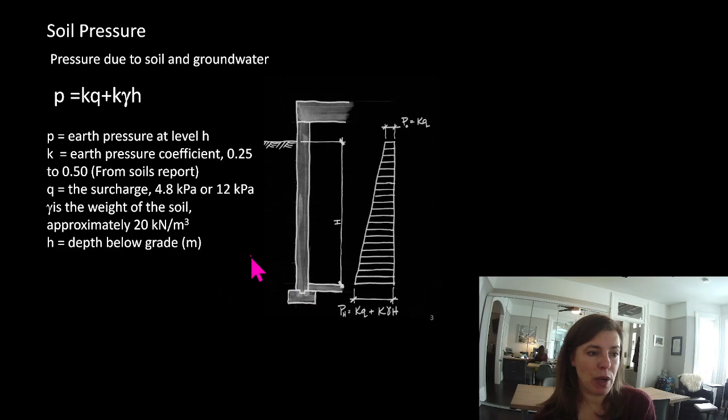Now, this wall here has a floor that stops it from tipping over. If this wasn't here, it would be a retaining wall, and we'd need something very large here to stop this from tipping over. All right, let's do a quick example.

I'm just going to check that my son shut the door. He did not. Okay, so sorry about that. If the door's open, if the door's shut, it at least gives them the tiniest desire to rush in here. They see it open and they come running in.

So the building previously discussed, I'm assuming the building that we talked about last week, has a 2-story deep basement, each one being 4 meters deep. The laneway adjacent to the building could be used for fire truck access. The geotechnical report states that the weight of the soil is 19 kilonewtons per meter cubed.

So that means every meter by meter by meter cube of soil weighs 19 kilonewtons. So a stack of soil a meter tall by a meter wide by a meter long is going to weigh the equivalent of about 19 Arnolds. And our K, or earth pressure coefficient, is 0.3. So these two things were given to us from the geotechnical report.

What is the soil pressure in kPa at the top and the base of the foundation wall? So let's do this example here.

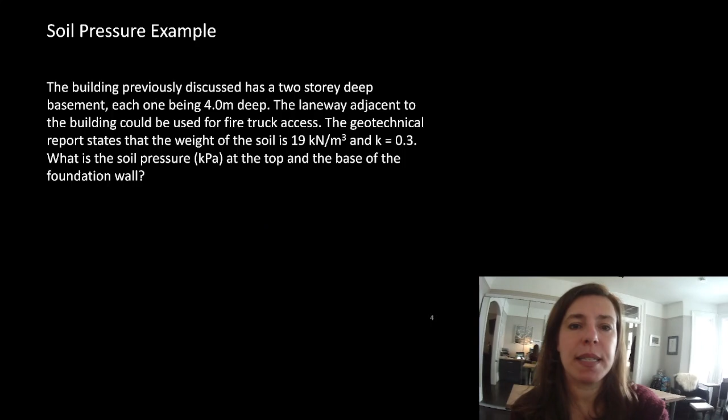Okay. I apologize, my kids are very, very loud today. Okay.

All right, so I always find that if it's something that doesn't have a picture, to draw a picture. I find drawing pictures very helpful. And like I said, over the next few weeks, we're going to spend a lot of time actually drawing pictures.

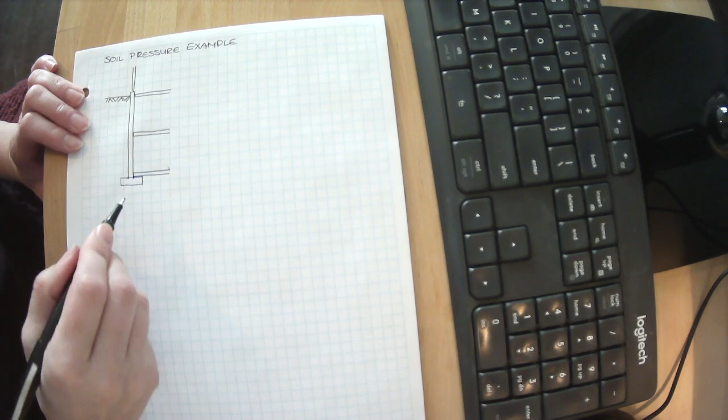So this is our soil pressure example. Here's our building. There was some building up above here, and we know there is the ground floor here, and then 4 meters down there was another floor, and 4 meters down is our basement. So let's draw something to represent our floors here. Here's our basement. We've got some sort of footing here. And here is our foundation wall. And here is soil, and there's some building up here. All down here is soil, and this is soil. They have told us that this could be used for fire trucks.

Do you like my fire truck? Yeah. This is why I'm an engineer and not an architect.

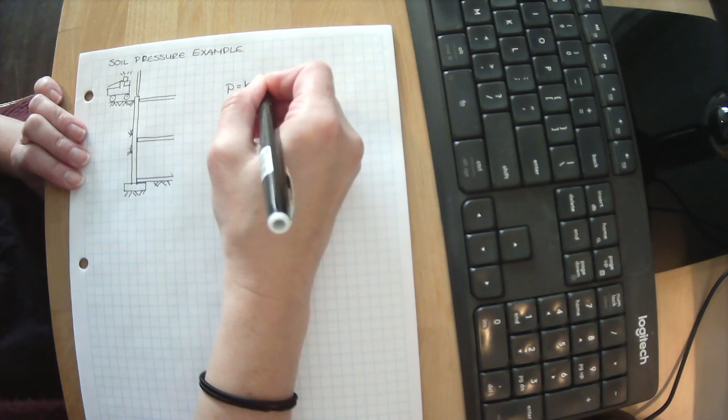Okay, so we know that the equation for earth pressure is P equals KQ plus K gamma H. K, the geotechnical report gave us as 0.3. Gamma, the geotechnical report gave us as 19 kilonewtons per meter cubed.

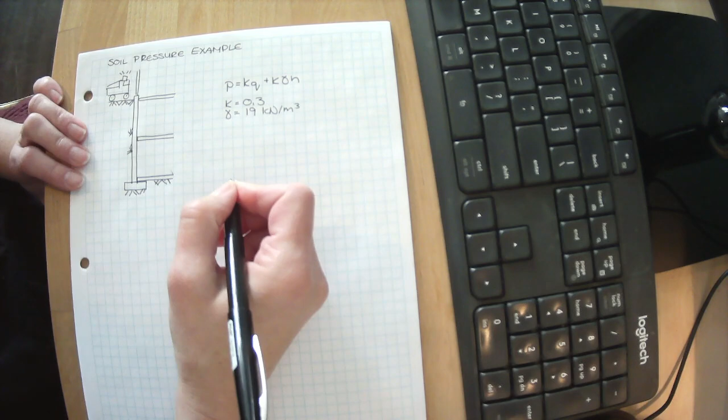Q is the surcharge. Well, if it can have fire trucks out here, fire trucks we know have a live load of 12 kPa. All right, so we could have up to 12 kPa of live load out here. So we need to design this to resist the surcharge of 12 kPa out here. And then that gives us our K, our Q, our K, our gamma.

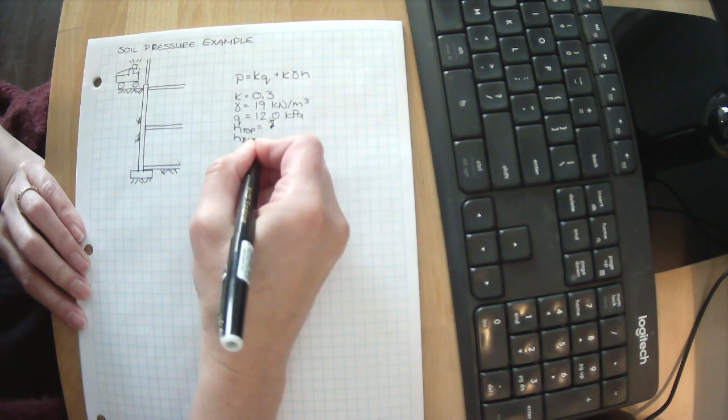We have two different H's. We had H at the top, which is 0 meters, because we're right here, and H at the bottom. They told us that each story was 4 meters.

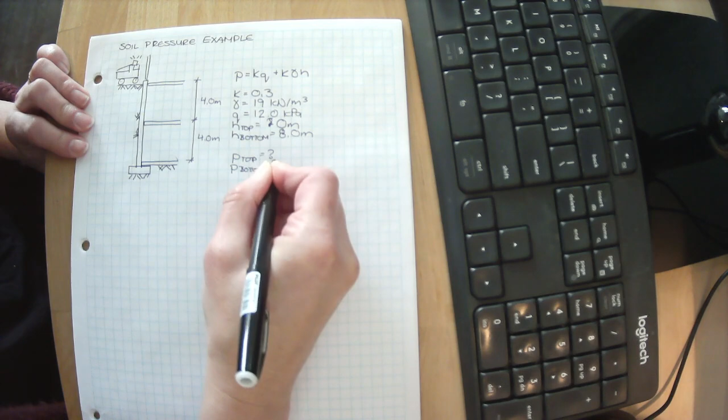And what we're looking for is the pressure at the top and the pressure at the bottom. I'm not very focused for some reason.

All right, so P at the top: our K regardless is 0.3. Our Q regardless is 12. Our K is 0.3, our gamma is 19, and H at the top is 0. So the pressure at the top is 0.3 times 12 plus 0.3 times 19 times 0. And we have 3.6 kPa. So the pressure pushing in right here at the top is about 3.6 kPa.

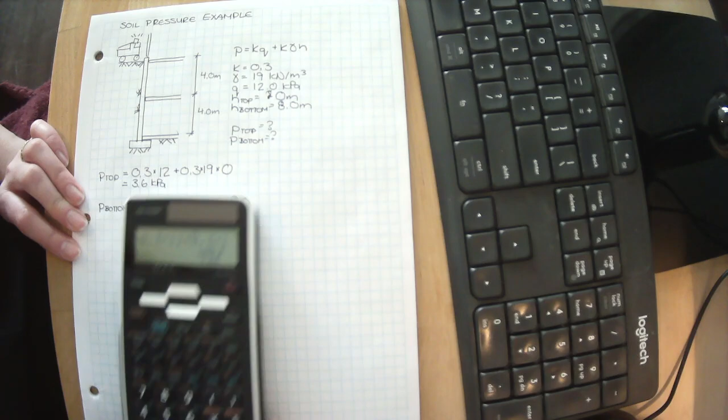Let's look at the P at the bottom. All right, we still have 0.3 times 12 plus 0.3 times 19, times this time we're all the way down here at the bottom, or 8 meters. So we have 0.3 times 12 plus 0.3 times 19 times 8 equals 49.2 kPa.

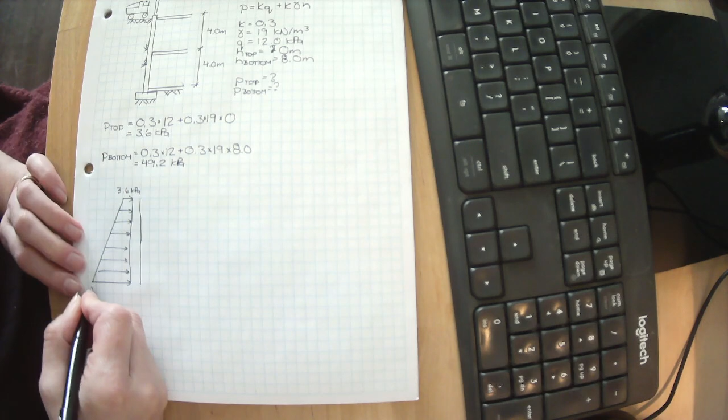So what we're saying is we have this wall that is 8 meters tall, and right here we have pressure pushing in. Up here it's 3.6 kPa, and down here it's 49.2 kPa. If this is my wall, what's stopping it from sliding this way? Well, we know right here we had the basement, right here there's some second floor or second basement, and right here we have the ground floor. So this pressure is trying to push in, and the wall is going to bend between these spots and bend between these spots. And that's all the question has really asked us, is what are these values here?

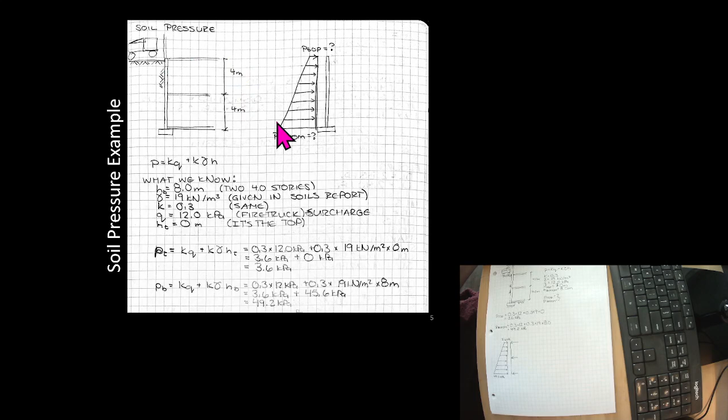So here it is worked out for you as well in the slideshow. Feel free to take a look at this on your own time scale if you want. Oh, my fire truck was equally bad in that version of drawing it. Okay, and here it is worked out, typed out, just so you can see it nicely if you find you have a hard time with my handwriting.

Okay, let's come back up to me.

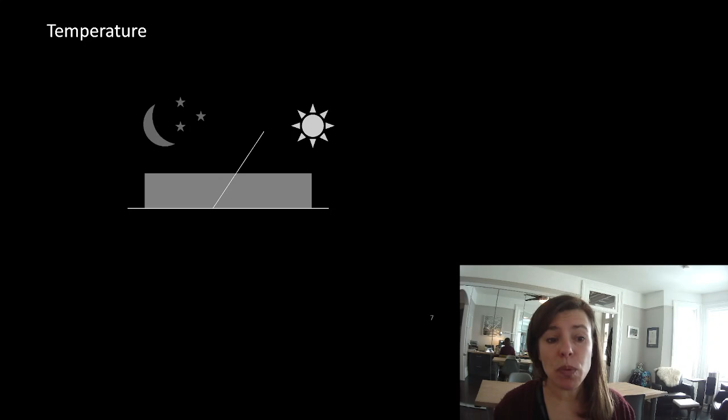All right, so what are some other load types? Now these ones are less common and ones that we don't tend to worry about as often in design. That doesn't mean they don't exist. They can be very important in design.

So one of the big ones is temperature. Steel expands when it's hot and contracts when it's cold. Most of the time, or for the life cycle of most buildings, our steel is inside an envelope, so its temperature variation is maybe 16 degrees to 30 degrees. Most places have air control systems of some sort, so the steel in the building would be kept in a relatively narrow margin of temperature.

It often has a big impact on, I'm drawing a blank on the word, where you don't have an air system inside your building, like an open building, an uninsulated building, or during the construction process. Projects I've had to worry about it on have been community centers where there were arenas and swimming pools in the same building, because it can have a big impact. Or buildings where you have gyms that can turn into an arena.

Now, most arenas, the slab for ice is really, really good. I remember playing hockey in the Ricoh Coliseum and at the new version of the Maple Leaf Gardens. And the lights are so hot on the ice that you can actually feel it when you're skating under the lights. You'd have to really plan your gear when you were playing on those ice surfaces. But then I also remember playing at York University in their rink, and it being so cold that your feet would freeze. So different rinks can have different kind of air makeups depending on how they're being used.

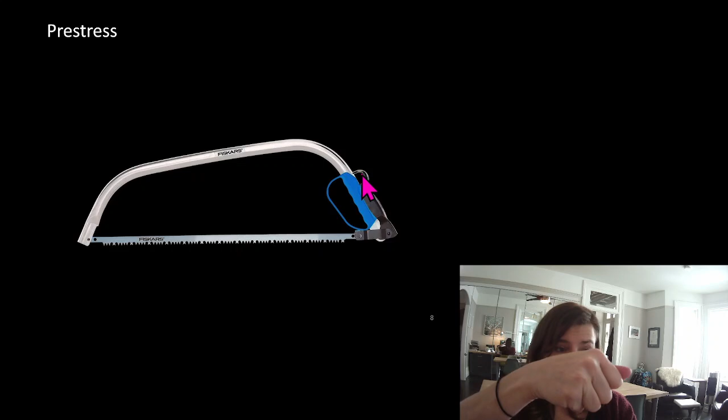And so this is a prestressed saw. If anyone's ever tried to saw before you pre-stress it, it doesn't work - that blade will buckle. What you do here is it's a loose fit, and then this clasp, as you clasp it shut, pulls it taut.

Vibration is another load that we worry about. Most buildings are massive enough that vibration isn't a concern. The times it can be a concern are usually on light, whippy steel structures. This tends to be what I think of when I talk about vibration. One of the things we really are concerned about vibration on is feature stairs, since normally there's very little material on them to help deal with that vibration, and people are very sensitive to the movement.

So we have continuous vibrations, which are a steady repeating load. Like I've told you before, humans often move at about 2.5 hertz, and I gave you guys a little demonstration early in the term about that.

We have damping, which is often helped with by the mass of the building or the friction within things. The example I talked about at the beginning of the term was the Olympic weightlifting floor in the Goldring Center for High Performance Sports, where what we ultimately did was isolate the floor from the rest of the building. I don't think I drew it - I'm going to draw it for you guys just because it's a fun thing, on how we isolated that.

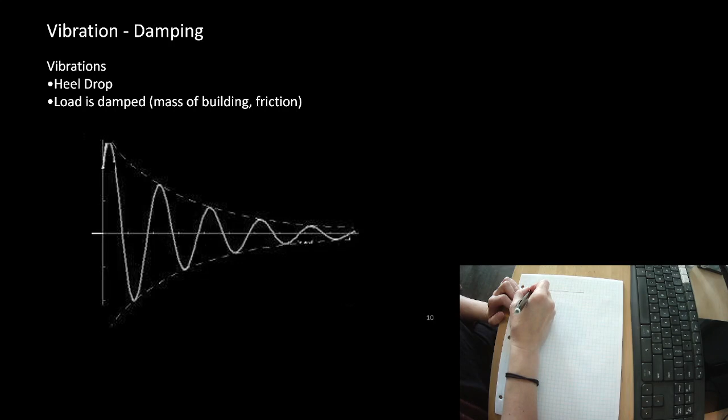So what we had was up here on this floor - these were all of our trusses, drawn poorly, I apologize. So up here we had - you guys can't see that, give me just a sec. Okay, up here we had an MRI.

Right here we had an Olympic weightlifting floor. These floors are hung from this floor, which is very sensitive to vibration. This causes a lot of vibration, so you can imagine you throw this down, it vibrates up these and impacts the MRI right here.

So what we did for this floor, most of our floor was hollow core slab on steel beams. What we did in the zone of the Olympic weightlifting floor, because we wanted this to be a flush floor and not look like there was any difference, was we put in this very big, massive, solid, precast chunk of concrete.

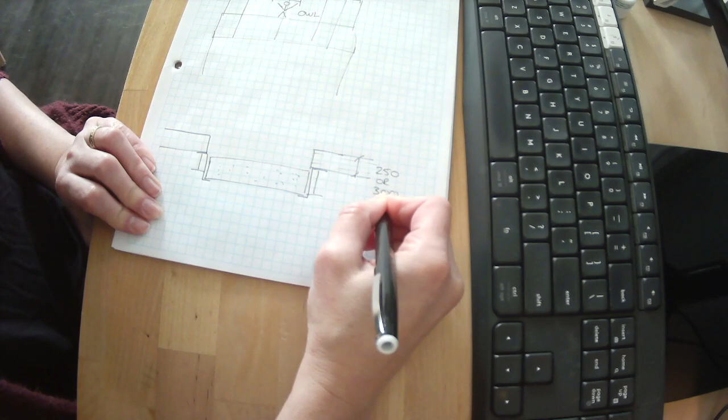So these were all, I believe, 250 or 300 hollow core. This was 500 solid concrete. We put a piece of bond break here and put hydraulic jacks in a grid of 1 meter by 1 meter, and then cast another concrete slab. So this was precast.

This was cast in place. We poured it 25 millimeters too low, and then we engaged all the hydraulic jacks to lift this up 25 millimeters.

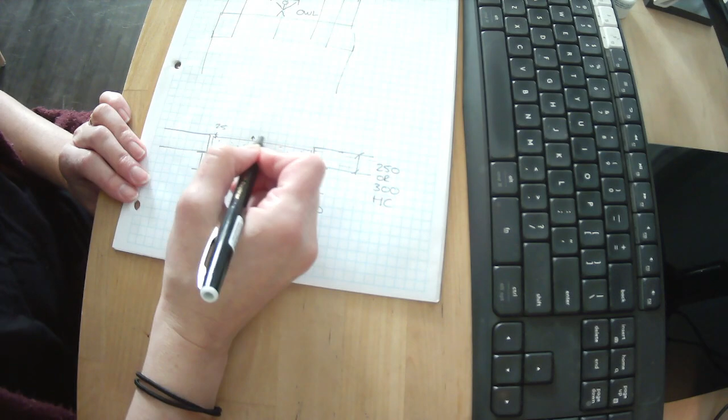All of these had isolation dampers inside of them. So now, if the Olympic weightlifting weights were thrown on this floor, this mass helped dampen it. These isolators took out most of the weight. This was massive and disconnected from this, only connected through a steel connection, so very little of the weight got transferred out to these elements.

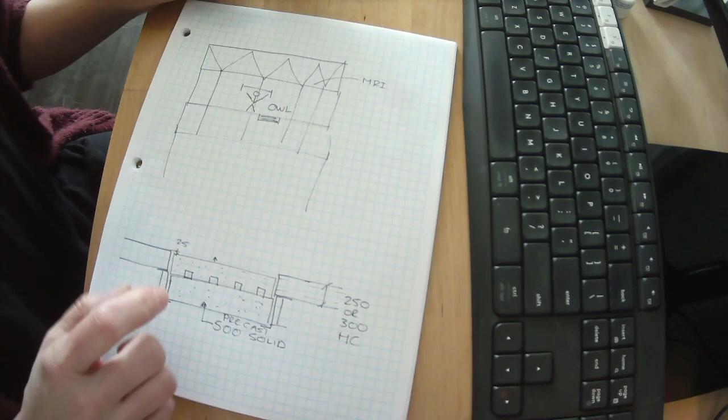So I've drawn this poorly. This person wouldn't have been right under the column. It would have been more like right here where our Olympic weightlifting floor would have been. I gave a tour once while they were using this floor, and I had a person stand right here and a person stand right here. These people could not feel the vibration. These people said that they felt it so strongly, it was almost unnerving.

We do check to make sure our buildings don't have resonance that would allow for amplification. That means we try to make sure our buildings do not have the same natural frequency as exterior stimulation, such as the continuous vibration of people, wind, and the natural frequencies of other things like mechanical units.

So we've talked about all of the loads. Now what we need to talk about is factors. How do we factor up our load? We're pretty sure we know exactly what the maximum load our building could see for dead loads, live loads, snow loads, wind loads, and seismic loads. But what if we're wrong? What if we should build in just a little bit extra? How do you pick how much? If you wanted, you could pick 10 times as much, but the building becomes really expensive to build that way.

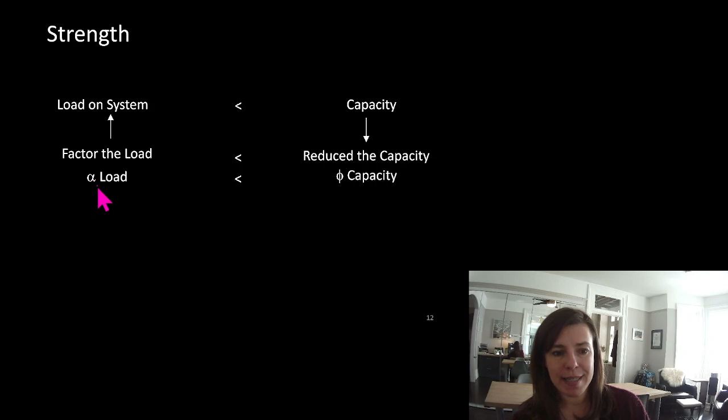Next term, we're going to look at this symbol a lot for the different materials. I pretty much only draw this symbol once, and it's today. Actually, I don't even draw it. I show it to you in a chart in about 2 minutes.

So we factor the load and make sure it's less than the reduced capacity. This term, we're going to spend all of our time figuring out what the factored loads are on our members. Next term, we're going to figure out what the reduced capacities are.

That means the 2 courses are like one continuous course. We have to know how to do this part next term, because what we're going to try to prove is the factored load is less than the reduced capacity. One time somebody complained that they didn't think it was fair that they had to know Structures 1 to do Structures 2. I like to reiterate that yes, you have to know Structures 1 to do Structures 2. It's one continuous knowledge stream. I've broken it up into material sections or data sections, but it is a progression of knowledge.

So the subscript F means that we factored that load. It just means if we're talking, you can see at a glance that it has in fact been factored. I do this all the time in my design sheets. I wonder if I have any open.

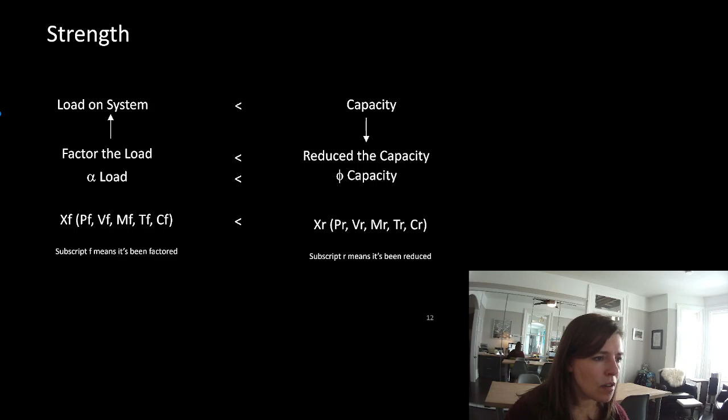Let me just open one of my design notes. This one's not the best. This one... I often will show

factored, unfactored, and then factored, but you can see here VF and MF. I'm telling myself I have in fact included that factor in this. And the reason that's important is if I came back later, there are certain things where we don't include that load factor, and that is our serviceability stuff. Remember all of our damaged finishes and human comfort and all of that stuff? Well, for those, we don't have the factor applied. And that's why it's important to know what we're talking about. The shorthand for most people is to use this F to say that we're talking about the factored load.

The subscript R means that we've talked about the reduced capacity. This reduction factor has been applied to the material. This whole method of design is called limit states design. Now, we have ultimate limit states, which is our factored life safety strength issue. We also have another subset that's called serviceability limit states, and that's our stiffness stuff.

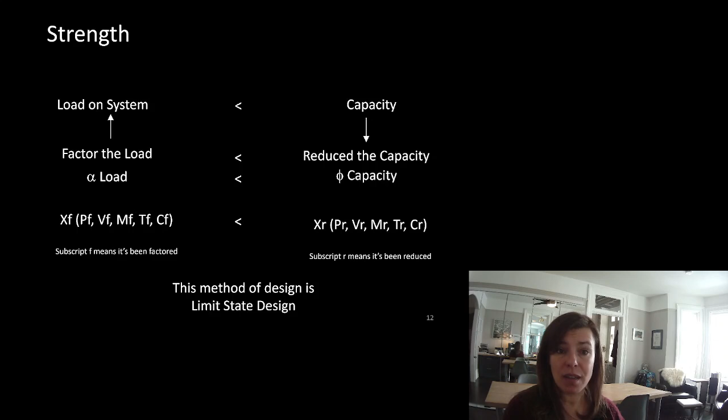Remember, strength, stiffness, stability. Stability, next week we're going to talk about drawings, and we'll know how to satisfy our stability requirement. Today, we're talking about the load factors that we use for strength and the factors we would use for stiffness or our deflection or our serviceability limit states.

So, limit state design. Ultimate limit states, or ULS, is talking about strength. Serviceability limit states, SLS, is talking about serviceability. In the code, the National Building Code of Canada, you get this chart.

Last year I had somebody say to me, this chart is different than what I found on the internet. Well, it's different because I had two different people send me charts. One was looking at an American chart, so their load factors are completely different. I said that they figure out their loads slightly differently, and then they figure out their factors slightly differently. It works out to be about pretty darn close to the same factored load.

But they adopted it in 2015 in the National Building Code, but provincially they didn't adopt it until around 2020. They changed some of these factors. So we have a principal load case. These are our load combinations for our principal loads. D is our dead load. So load case 1 is 1.4 times our dead load with nothing else. It's all by itself.

Then we have our next load combination, which is 1.25 times our dead load. We'll come back to the 0.9 times dead load, plus 1.5 times the live load. But then look over here - it also says we have to include 1.5, or 1 times the snow load, or 0.4 times the wind load. So these are actually 2 load combinations.

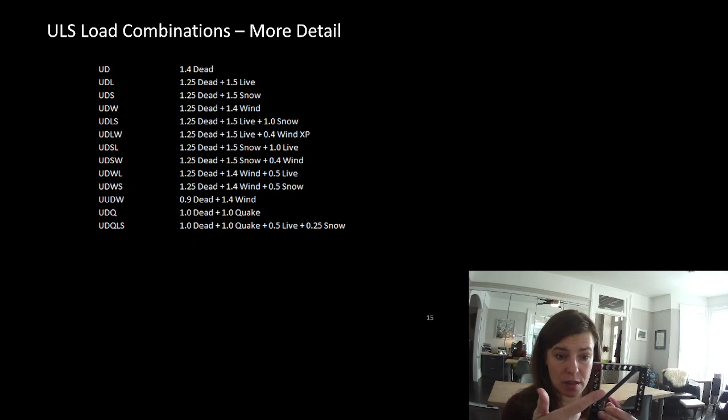So our dead load pushes down and our wind load pushes up on this column. For that, we'd have 0.9 dead and 1.4 wind load. Would live load just mean less tension on this column? Yeah, we could add the other load case with live pushing down, but we want to figure out the least amount of load pushing down while we simultaneously have the most load pulling up, because we need to look at the envelope—the worst case of compression and the worst case of tension.

And then we have our earthquake loads—dead and quake on their own, and dead and quake with live or snow. The reason we don't always just add live and snow is the same: what if the quake load was pushing this way? Live and snow would be counteracting the quake load. So we need to look at both ends of that spectrum—just dead and quake, and dead, quake, live, and snow—to look at both extremes.

Okay, so this says wind. Look, I said wind XP—that shouldn't have been there in this one. It just says wind for the most part, but I have a building.

Wind could go in this direction, wind could go in that direction. But wait, my building has two directions—wind could also go in this direction, and wind could also go in this direction. I have 4 wind cases. So that means anywhere that had a wind combination needed 3 more combinations.

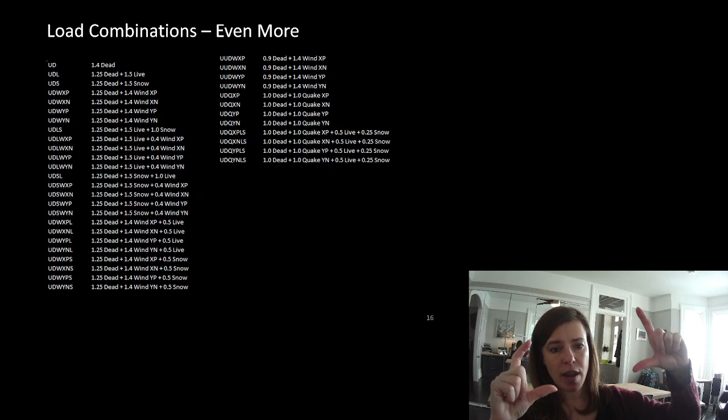But wait, do you remember our wind loads had end zones? So if this was our building and the wind was going in that direction, we needed to think with an end zone here and an end zone here. If the wind was going this way, end zone here and end zone here. So we actually have to double all of our wind load combinations.

Earthquake, we have torsion that we worry about, which is essentially what our end zone is doing in wind, and that's very clearly stated in the building code. If this is our roof and we think the center of mass is right here, we say it could be 10% to either side. So we build that eccentricity into our roof, which means we have even more combinations.

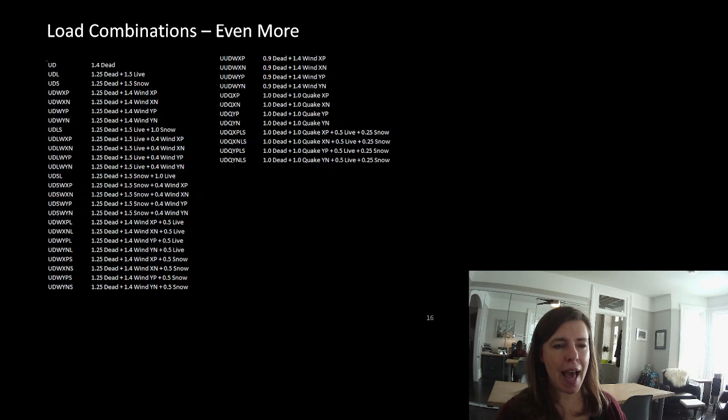I don't think I add another slide—so that's almost 40 combinations, but that's still not enough because we have our end zones and our earthquake torsion. I've done a project where they did a wind study, looking at wind in different patterns on the building. I did a snow study project that had 12 different snow combinations on the roof, so for everywhere I had a snow load, I needed 12 versions of that. That particular project had over 1,200 load combinations. So you can see why having a computer program becomes very helpful, because I needed to apply those 1,200 load combinations to every single element in the project.

Tracking becomes very important here. I often say that this lecture is basically about accounting. You need to keep track of all your lines of data and pull out what the worst one is.

Imagine you're doing a projection for a business. You want to look at the version where you did the most business possible each month and your costs were the lowest possible each month - that's your highest profit. But you also want the version where you made the least money every month and your costs were the highest every month - that's your lowest profit. It could even be negative.

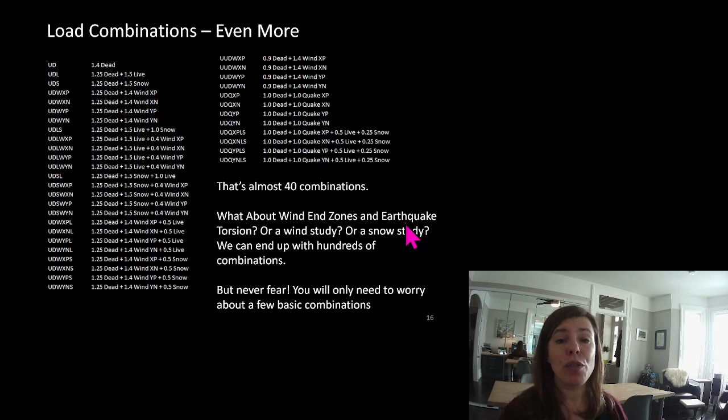All right, so that's just our strength. Remember, we have strength, stiffness, and stability. Stability, we draw drawings. Strength, we apply all those load combinations, and yes, there's still more work - we need to think about axial loads, shear loads, and moments.

But then we also have stiffness, tied to serviceability. Serviceability limit states - you looked at what the serviceability criteria were at the beginning of the term, and we don't yet know how to connect these two things, but we know those limits need to be maintained. So we're going to have some loads that cause actual movement. The actual movement we'll talk about next term, but the loads that cause it are the serviceability limit state load combinations.

These calculations use the importance factor for serviceability. Remember the importance factor for snow and wind in a normal building was 1, but for serviceability it was 0.9 for snow and 0.75 for wind. These serviceability limit states use those serviceability importance factors.

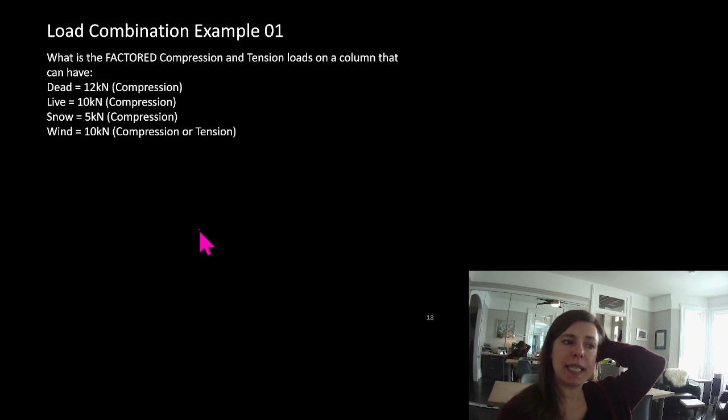Okay, load combination example 1: What is the factored compression and tension load on a column that can have 12 kilonewtons of compression for dead, 10 kilonewtons of compression for live, 5 kilonewtons of compression for snow, and wind 10 kilonewtons of compression or tension?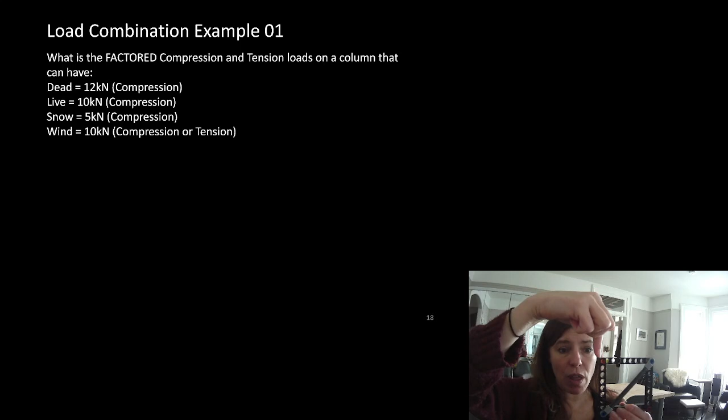So that's saying this column here could have 12 kilonewtons of dead, 10 kilonewtons of live, 5 kilonewtons of snow, 10 kilonewtons of wind, or 10 kilonewtons of wind. We need to think about what that means for this column - we want to look at the worst case compressive load, and if it exists, the worst case tension load.

Okay, so let's do this example. All cool with the kids in there?

Yep, for now. The kids have been home together for 3 days now, pretty much in isolation, meaning as much as they love each other, they are on the verge of being at each other's throats, which means everyone is on the verge of being at everybody's throats. Okay, I'm going to take a drink of water. Hey, just to show you my kids do love each other, I'm going to share a drawing, just because I'm a proud mom. This is a drawing my 5-year-old drew. He drew himself and his 3-year-old brother. When I asked him what it meant, he said, 'Mommy, this is me and Duncan, and we're asleep, and we're sharing our dreams.' So, you know what? Good kids, I think, but right now, everyone's a little on edge.

Okay, let's look at our example. I've told you the best thing to do is keep track of your accounting. So I'm going to draw, I always like to draw a little picture. Let's draw this column right here. We don't really know what any of this means yet. I'm going to draw my free body diagram. You have no idea what a free body diagram is yet, so do not fret, do not worry. We are going to learn this soon enough. Let's see if I can get this down just a little bit more.

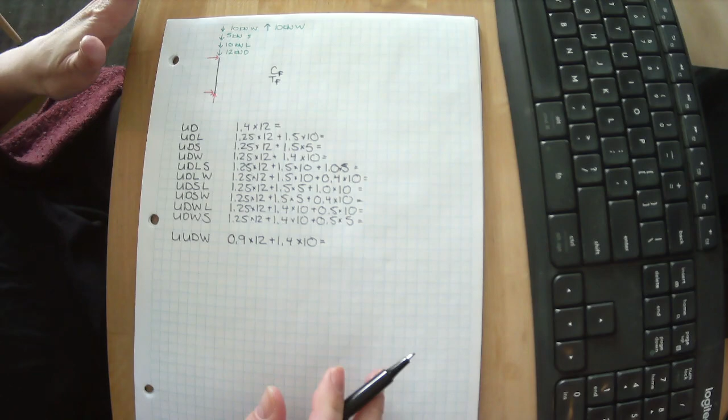So 0.9 times 12 plus 1.4 times 10. If you want, build a spreadsheet and take a look at all of these. Actually, sorry, not plus, minus. This one's acting downwards, this one's acting upwards, so that needs to be negative. All of these are acting downwards, they're all acting in the same direction. This one is not, it's acting in the opposite direction.

So let's plug some of these into our calculator. 1.4 times 12 is 16.8 kilonewtons. 1.25 times 12 plus 1.5 times 10 equals 30 kilonewtons. So we already know that one's not our worst case one.

Let's see if we can get that light a little bit better for you there. As the sun is coming out, my paper is getting really reflective.

Okay, 1.25 times 12 plus 1.5 times 5. All right, so that's 22.5 kilonewtons. Well, that one's not the worst case, we still got 30 as the worst case.

All right, 1.25 times 12 plus 1.4 times 10 is 29 kilonewtons. Well, that one's not the worst case either. 1.25 times 12 plus 1.5 times 10 plus 1 times 5 gives us 35.

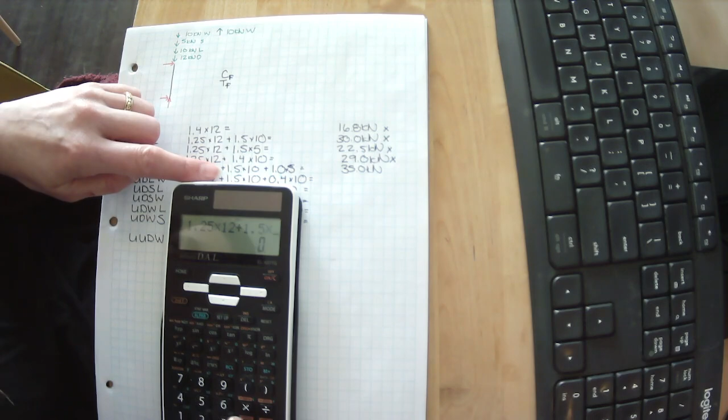Okay, let's check our next one. 1.25 times 12 plus 1.5 times 10 plus 0.4 times 10 equals 34 kilonewtons. Well, it's not that one.

We've got 1.25 times 12 plus 1.5 times 5 plus 1 times 10, which is 32.5 kilonewtons. It's not that one. 1.25 times 12 plus 1.5 times 5 plus 0.4 times 10 is 26.5 kilonewtons. It's not that one.

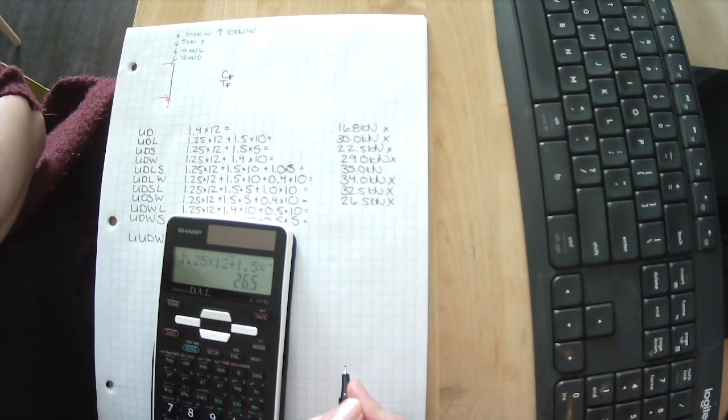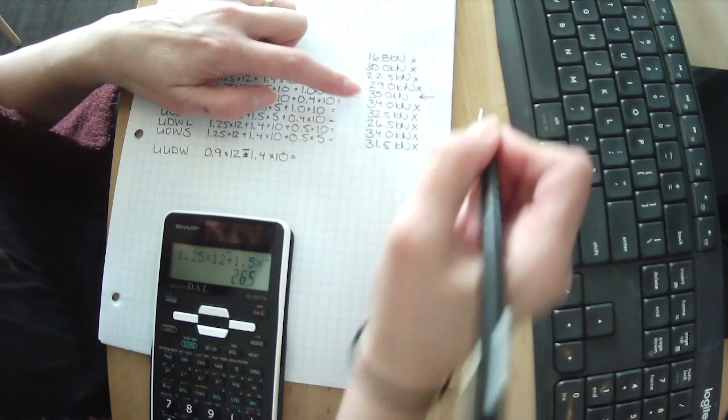I'm just going to start writing these in because I've already calculated them previously. That one's going to be 34, it's not going to govern. And this is 31.5 kilonewtons, so it doesn't govern. That tells us that our worst case compressive load is this one right here, our 35 kilonewtons.

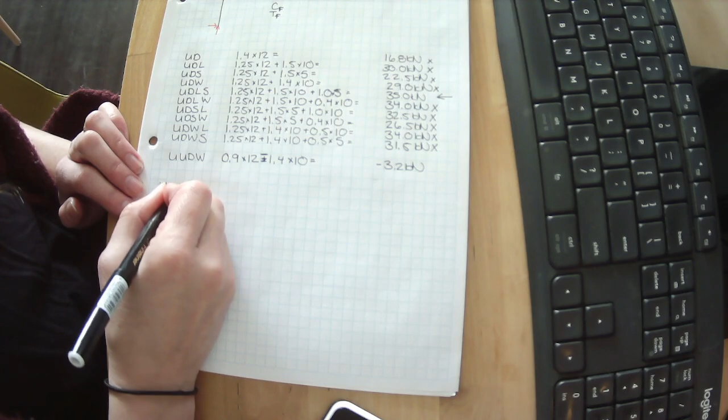We also need to worry about our worst case tension load. I'm going to show you one in just a minute where we can still take a look at this, and I'll show you why I'm only bothering calculating one. 0.9 times 12 minus 1.4 times 10 equals minus 3.2 kilonewtons. So this load's acting down and that load is acting up. What if, just for fun, I checked ultimate uplift dead live wind? So 0.9,

Actually, what if I did 1.25 times my 12 plus my 1.5 times 10 minus my 1.4 times 10. Or sorry, it would be 0.4 times 10. 1.25 times 12 plus 1.5 times 10 minus 0.4 times 10. It's 26. I know that this is the worst case one.

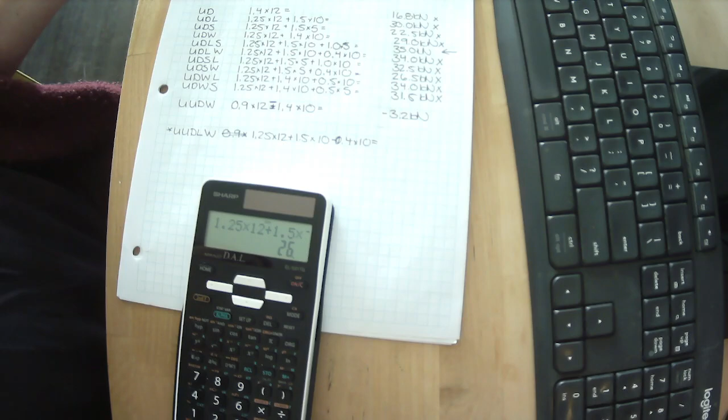These ones weren't as obvious because I had two values worth 10. It wasn't going to jump out to me because look at even how close these two were to each other. But for the uplift version, we know anything acting downward is just going to lower our value, so this just isn't worth bothering to check.

So these are our worst case: CF equals 35 kilonewtons and TF equals 3.2 kilonewtons. So this is acting down and that is acting upwards. So this column, I'm

Gigantic. Okay, make me smaller.

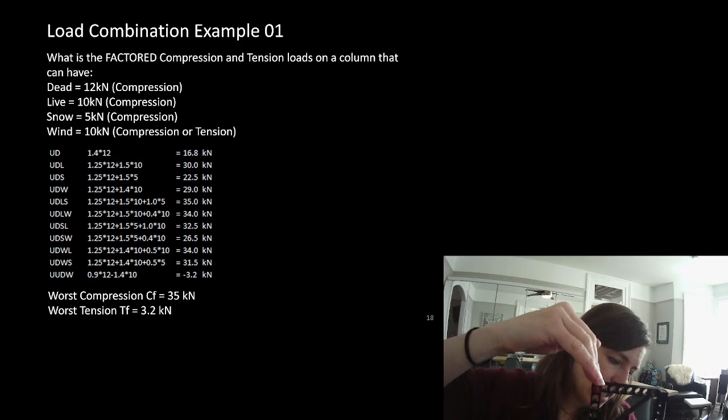If the wind isn't blowing on this column here—we're in a normal building without the wind blowing—our worst case load for our column is our dead live snow case. So this column right here could see the maximum compressive load of 35 kilonewtons.

So we take the people off, the snow comes off, we've still got our dead load, but our wind is trying to lift that column up. It's trying to pull up because it's trying to tip it over, just like that. I actually broke this.

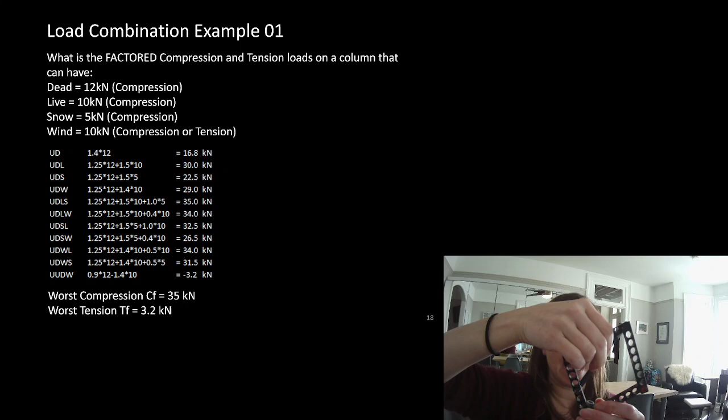We want to look at this with assumptions that we maybe overestimated our dead load, because we need to design this to not pull apart. This brace needs to be designed for that tensile load too, so that doesn't happen. They build them better than plastic toys. Okay, so here is that all worked out for you as well.

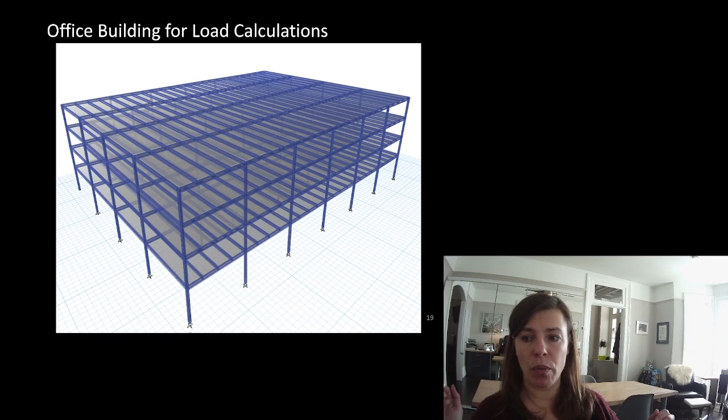Okay, we're going to do another example because I know some of you already have this—you've got it, you figured it out, and you're like, this is the easiest thing ever, Shannon. But I know for some of you this is a really hard one to process. The uplift thing seems to throw people off. I will admit, tracking these things is a pain in the butt. I make mistakes with it. This is why I suggest you use Excel, and I suggest you talk to each other, because this one you should really be communicating. Don't rush and try to do it all on your own. Talk to each other and make sure you haven't made a typo, because it's really easy to do.

It's why, even when I'm building my complicated models, I will often do a hand check to make sure I haven't screwed up entering things into my modeling program, for example. Let me open one of my models here to show you... it's just taking its time here. Sorry, I'm going to close this.

Okay, just because we were talking about it, here's the design software I happen to use. Let me pull up a good project—this is a project in California.

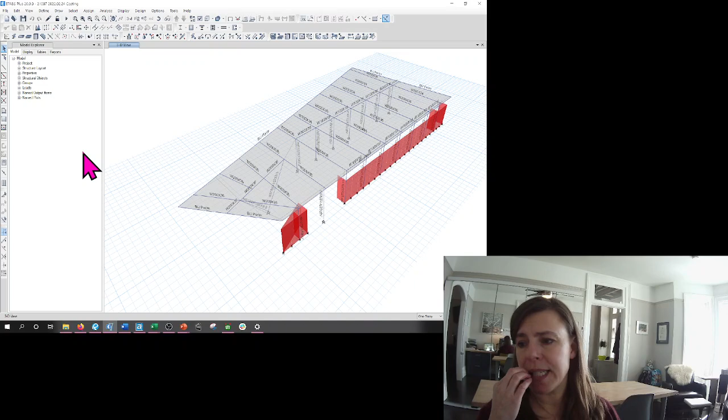Let's take a look at my load cases here. It shows up on a different page, of course. It's a little hard to see, but I've got my self-weight of dead, my superimposed dead, live. I've got quake in 4 directions, wind in 4 directions, but also incorporating torsion. And then in my load combinations, I incorporate torsion for my earthquake. So here are my load combinations.

Okay, take a look at this—you can see that I've built these in. And if I open up any one of these, you can see that I am building these things in. In this one, I needed to worry about it as a downward load, but then also as an upward load.

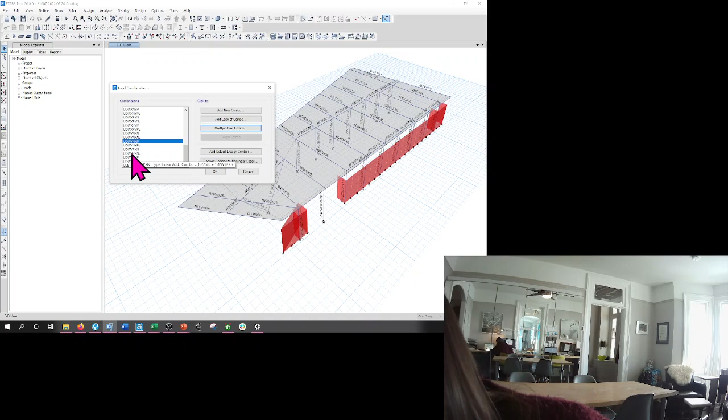This building wouldn't have snow or live load on the roof—no snow in California in this particular region, and there's no live load on this roof. So I needed to look at... here's that same combination, but the uplift version of it. I had it acting the worst case for both things. Now this is a lateral load, so it's how it's being applied.

Okay, so I just wanted to show you what's happening in models—that I actually do all of these things I'm telling you that we do. These are not abstract things. These are things that engineers do every day when they set up every project. So this is a real process that we're thinking about.

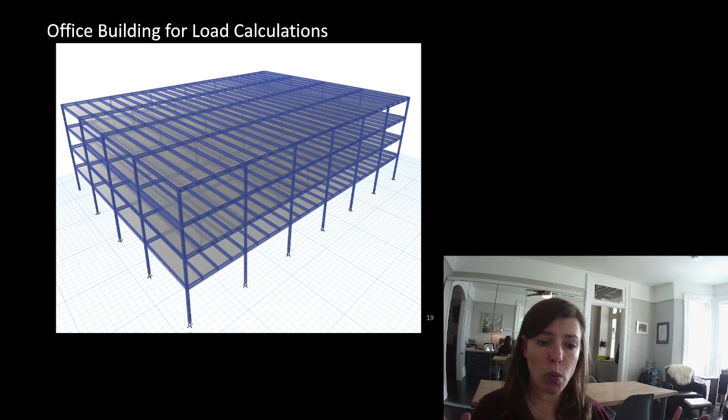So you saw that my building was this complicated little gem, but we're going to go with a very basic, simple one here. We've got an office building with a pretty regular bay. We've got purlins along here, major beams along these grid lines, and columns at all of the grid intersections. So here's a plan of it.

Determine the ULS and SLS load on the roof in kPa using the dead and snow loads we calculated last week. These were already done last week. We knew where our building was located, and we looked at the roof assemblies and floor assemblies throughout our building. So ULS and SLS for the roof. Determine the ULS and SLS on level 2, 3, and 4 in kPa using the dead and live loads calculated last week. What is the total load on column 1 and column 3?

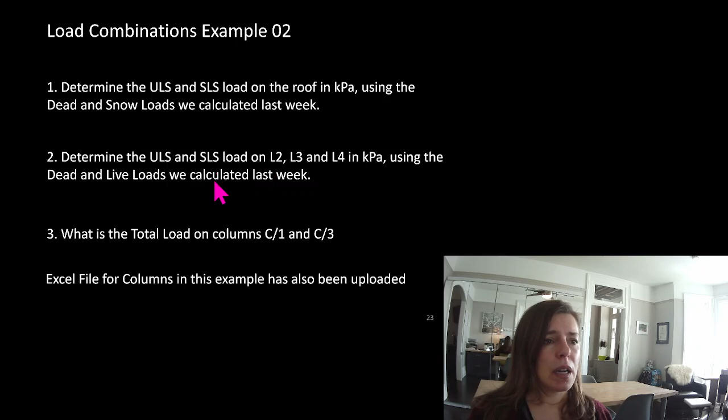Okay. All right, well, let's see. Actually, no, most of this... okay, I'm going to point us downwards here. And so we're just going to go through some of this right now. Actually, it might just be easier to do it this way.

I usually like to do the hand calculations because it slows the process down—it's easy to talk too fast if the calculations are already done. When I first set all this up, it was in the old building and there was no way to show hand calculations, and the touch screen they gave us was too hard to show information on. So I thought I was being smart and did it all ahead of time in PDF, embedded in the presentation. But obviously people found it went too fast, so I'm going to try to talk slowly and do it as if I was writing out the hand calculations, because when you're writing it out, it's a lot easier to talk about it. If you are struggling with any of this, I suggest you take the time to do it as a hand calculation.

So last week, we calculated the roof loads. We figured out the dead load was 1.32 kPa—we looked at the dead load assembly and figured out the dead load on the roof. We knew where the building was located, so we were able to calculate the snow load, and we calculated both the ultimate limit states and the serviceability limit states. We know this means a 0.9 importance factor is embedded in it because we're talking about serviceability.

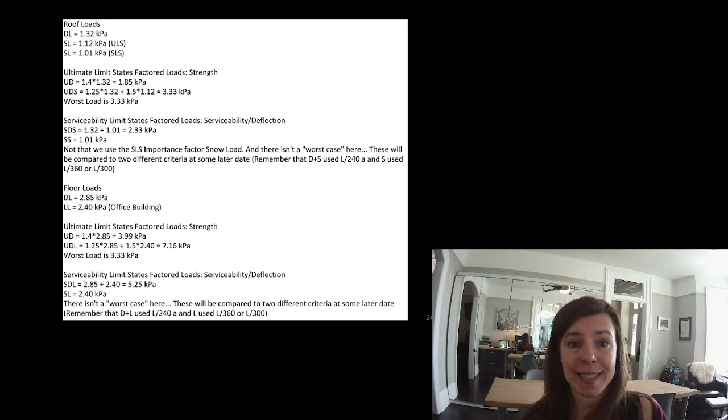You are going to do an example in the assignment that is very similar to the last example, where it's a smaller problem, but you have all of the load types. So you're going to do both sort of things. I'm going to make you do an easy example with lots of load cases and a harder example with fewer load cases to try to work through the whole problem. I'm not going to give you a complicated problem with lots of load cases.

So we have our floor loads, and we need to look at dead by itself, and we need to look at dead and live together. So 1.4 times 2.85 gives us 3.99 kPa, or 1.25 times our dead load plus 1.5 times our live load gives us 7.16 kPa. That is very much a typo here, so I will fix that typo. That should obviously be 7.16, and 7.16 is what's used in the example.

So slide 24, worst floor. You should be seeing 7.16 kPa as the worst case load. We can take the worst case here because we need to design this for the worst case.

Serviceability, we have two different criteria: dead and live together, or live by itself. There's no worst case because these will be compared to two different criteria at a later date, and by later date, I mean middle of Structures 2. We will use this information, I promise. I'm not making you track it in vain, but we don't have the knowledge yet to make use of it.

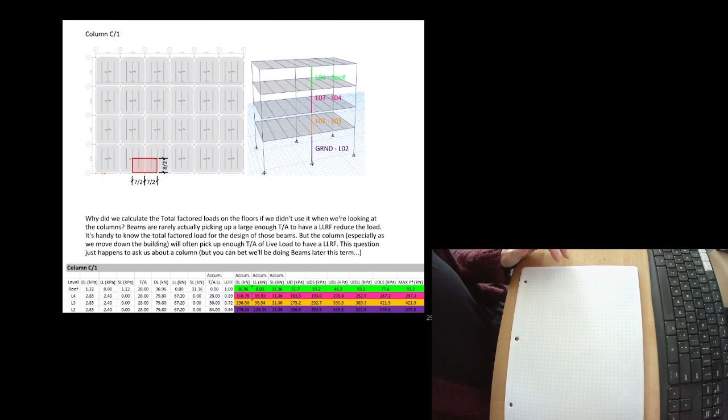I wonder if it's worth... do I have these worked out by hand? I don't. I wonder if it's worth doing it anyway. What I don't want to do is start something that is going to screw you up when it's all embedded here in the Excel file. Okay, let's go for it. We're going to take a look at it here.

Okay, so we have a column that is 4 stories high. And then here's the ground. All right, so it's not picking up the ground.

This is the roof. This is level 2. This is level 3. And this is level 4. So this portion of the column is, we're calling it level 4 to the roof. This portion is level 3 to level 4. This is level 2 to level 3. And this is ground to level 2.

We need to figure out what the worst case load is at every portion of this column. This has dead and snow on it. This has dead and live on it. This has dead and live on the floor, and this has dead and live on the floor. But this column only has dead and snow. This column has dead and live and snow. This column has dead and live and snow, and this column has dead and live and snow.

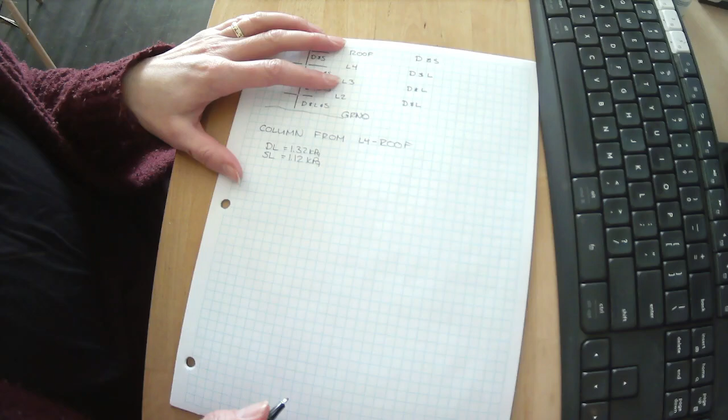Let's just focus on this hard part. Okay, so we've got our dead load and our snow load. And we know that our tributary area is 7 meters by 4 meters, or 28 meters squared. Our ultimate, well, let's actually figure this out one at a time. Our dead load is going to be 28 times 1.32, and our snow load is going to be 28 times 1.12. So every square meter of this roof is supporting 1.32 kilonewtons, and we've got 28 square meters. So we've got 28 times 1.32, or 36.96 kilonewtons. And we've got 28 times 1.12, or 31.36 kilonewtons of snow load.

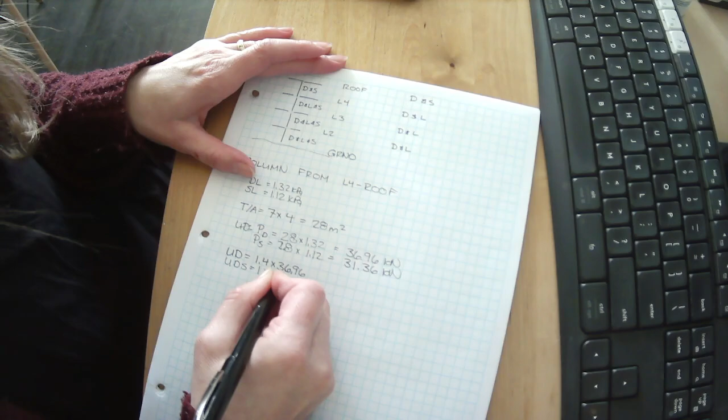Ultimate dead is 1.4 times 36.96. Ultimate dead snow is 1.25 times 36.96 plus 1.5 times 31.36. We get 93.24 kilonewtons. I forgot to calculate this. 1.4 times 36.96 equals 51.74 kilonewtons. What's the worst case factored load on our column from level 4 to roof?

Well, CF from level 4 to roof equals 93.24 kilonewtons. So that's easy. We've got our first portion of this done.

Let's take a look at the column from level 3 to level 4. From level 3 to level 4, it's supporting the dead and live from level 4 and the dead and snow from the roof. So it's this portion of the column here. It's picking up this dead and live and this dead and snow.

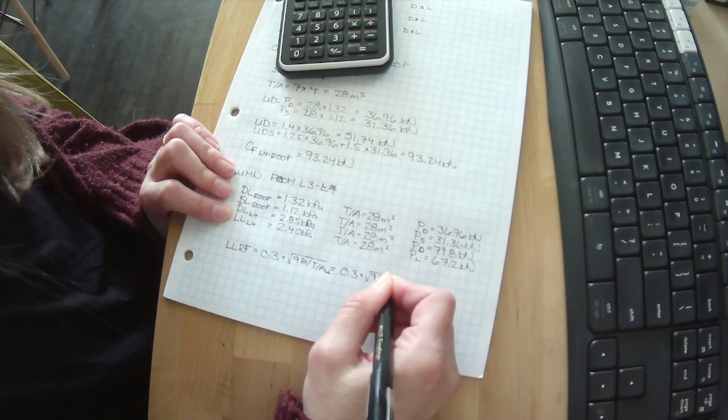Our live load reduction factor for this type of loading is 0.3 plus the square root of 9.8 divided by our tributary area. Our tributary area for this region of the column supporting live load is 28 meters squared. So 0.3 plus the square root of 9.8 divided by 28 equals 0.8916. So we've got a live load reduction factor that we can apply to this live load.

Let's take a look at our different load combinations. I'm not going to stop and do dead and snow by itself and dead and live by itself, that's in the Excel sheet. I'm going to do it with the companion loads right in. So we're going to have ultimate dead, ultimate dead-live as the principal with snow as the companion, and ultimate dead-snow as the principal with live as the companion.

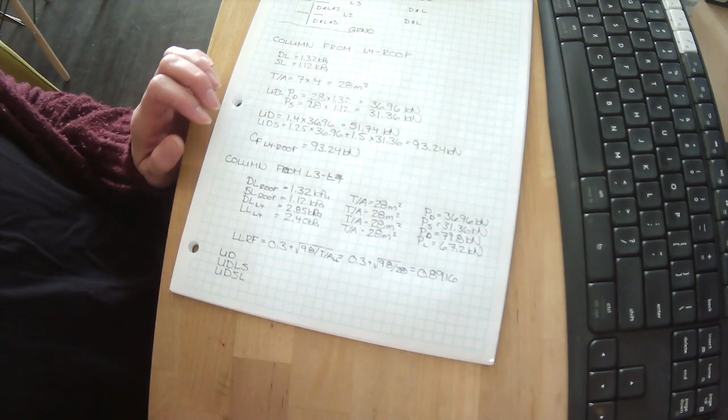This is 1.4 times our dead loads. We've got two dead loads, dead from the roof and dead from level 4, or 36.96 plus 79.8.

Ultimate dead, live, and snow: we've got 1.25 times 36.96 plus 79.8, plus 1.5 times our live load reduction factor times our live load of 67.2, plus our snow load times 1.

I'll have to write that. I'll give room for that right here. And then ultimate dead-snow-live. I wonder if I have a better black pen here, my black pen is dying.

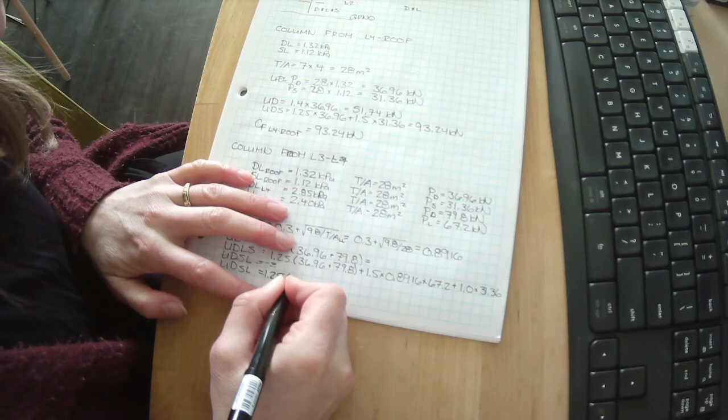We have our 1.25 times 36.96 plus 79.8, plus 1.5. Now our snow is the principal load, so our 31.36 plus 1.0 times our live load reduction factor times our live load.

Now we can plug these into our calculator. You can see it starts to get kind of complicated, and this is why using an Excel sheet can be very handy. So 1.4 times 36.96 plus 79.8, we get 163.5.

1.25 times 36.96 plus 79.8, plus 1.5 times our live load reduction factor times our live load, plus our snow factor times our snow load, gives us 267.2 kilonewtons.

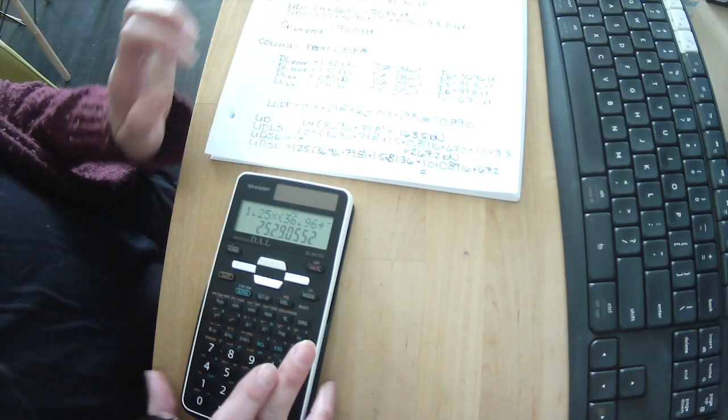So up here, we found that CF was 93.24. And for this section of the column, CF is 267.2.

All right, so we found two sections of our column. We still have two more sections to figure out. We've got loads of time, so I think this is fine.

Now we want to do the column from level 2 to level 3. So from level 2 to level 3, it is not supporting level 2. It is this portion of the column, and it is picking up level 3, level 4, and the roof. So it supports roof, level 4, and level 3.

We know the dead load of the roof is 1.32 kPa, and the tributary area is 28 meters squared, so P dead roof is 36.96 kilonewtons, already calculated. We know the snow load roof is 1.12 kPa with tributary area 28 meters squared, so P snow roof is 31.36 kilonewtons. We know the dead load from level 4 is 2.85 kPa, tributary area 28 meters squared, so P dead level 4 we already calculated as 79.8 kilonewtons.

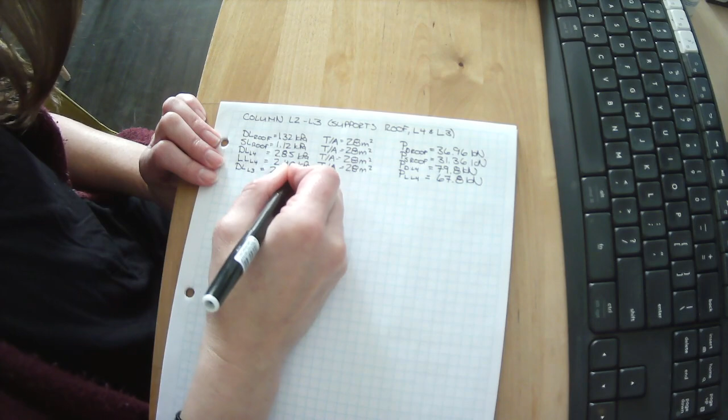Our dead load from level 3, we calculated last week that all the floors had a dead load of 2.85 kPa. Our tributary area is the same on all the floors for this example, but it doesn't have to be - we could have examples with different tributary areas. It's 28 meters for this one, so P dead from level 3 is also 2.85 times 28 meters, which is 79.8 kilonewtons. Our live load for level 3 is 2.4 kPa, tributary area 28 meters squared, so P live level 3 is 2.4 kPa times 28 meters, so it's 67.8 kilonewtons.

So we've increased the amount of dead load and we've doubled the amount of live load, but we've also doubled the tributary area of live load, so we're going to have a different live load reduction factor. The live load reduction factor is 0.3 plus the square root of 9.8 divided by the tributary area of the live load. We've got this live load of 28 meters squared and this live load of 28 meters squared, so we've got 28 plus 28, and we can calculate this live load reduction factor.

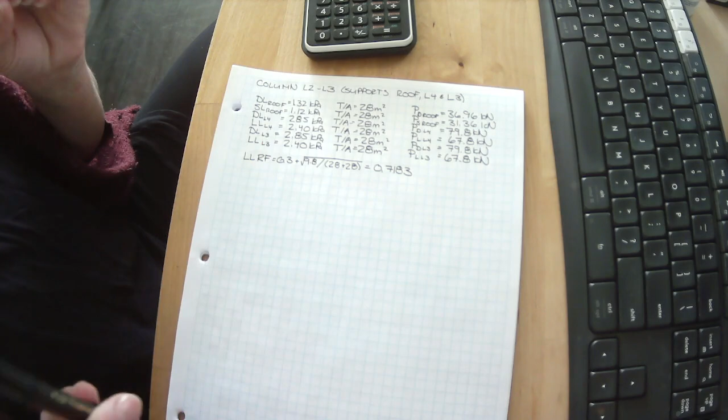In assignments and the final exam, I do both, where I keep an extreme amount of significant figures, and then I do it where I do a lot of rounding, and I make sure that the answer has a buffer built into it in case you do one of those two extremes.

All right, let's figure out what our total dead load is from level 2 to level 3, because we have 36.96 plus 79.8 plus 79.8. This might just make our load combination calculation a little less messy. So we have 36.96 plus 79.8 plus 79.8. We get 196.56 kilonewtons of dead load.

The snow load from level 2 to level 3 is still just the same load we picked up on the roof. And the live load from level 2 to level 3 is our live load reduction factor times our live load from both floors.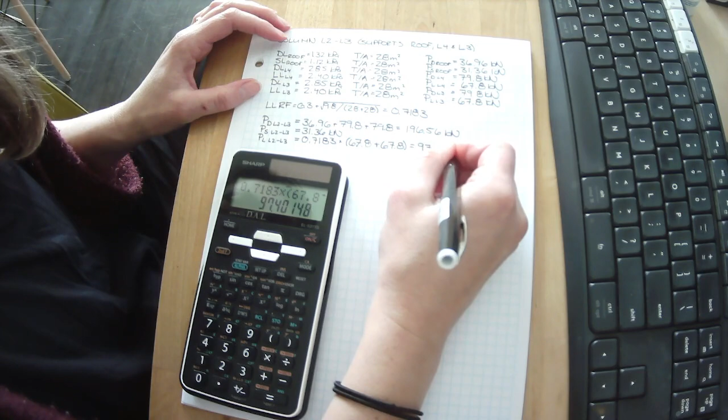So 0.7183 times 67.8 plus 67.8 equals 97.4 kilonewtons. All right, ultimate dead load is 1.4 times 196.56.

Ultimate dead-live-snow is 1.25 times 196.56 plus 1.5 times our live load. I've already put my live load reduction factor into that, plus 1.0 times my snow load.

And then ultimate snow-live. What do you think? My snow hasn't gone up and my live did, and in the last one, live is the principal load and snow is the companion governing. I know, just from looking at this, there's no way this one's going to govern.

I'm going to do it this time because I want to show you the process, but when we do the next floor, I'm not even going to bother to calculate this one. All right, 1.25 times 196.56 plus 1.5 times my snow load plus my companion load of live with the live load reduction factor already built in.

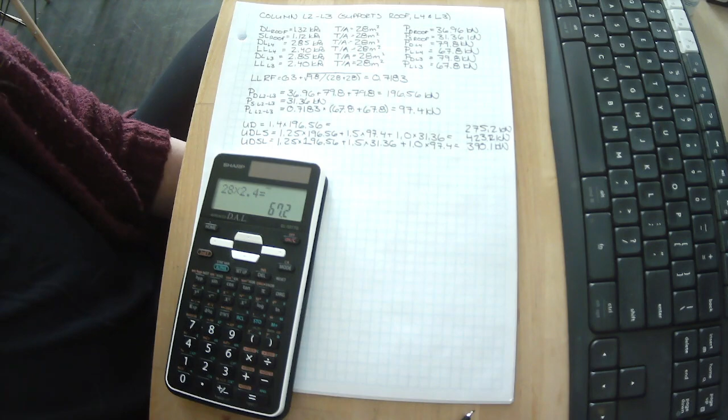You guys probably noticed it right away, and if we were live in person, you would have yelled at me while I was up on the stage, and I wouldn't have made such a ridiculous mistake. The process is sound, don't worry about it too much. This should have been 67.2, and this should have been 67.2. That 0.6 means that this value here is out by about 1.3 kilonewtons from the actual answer.

This is why double checking things is so important, and I was double checking it. I knew right away that something seemed weird here. So I have an Excel file, I've also done some stuff by hand. This is why for this assignment, I want you guys to talk to each other, compare answers. Don't just say give me your answer, because what if they did it wrong? You want to check it yourself.

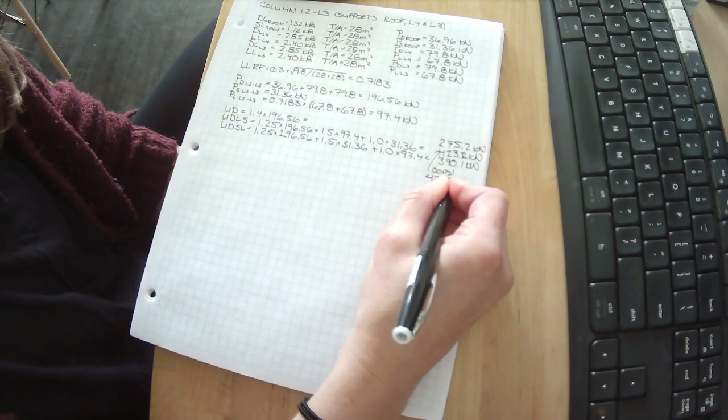Okay, so I was pretty darn close to this. I made an oopsie. So this should have been 421.9 kilonewtons because of this and this. Okay?

So from level 2 to level 3, CF equals 421.9 kilonewtons. All right, we have a final one to check. What is CF from ground to level 2? We want to figure out what that is. So, column ground to level 2.

So this supports roof, level 4, level 3, and level 2. We've got all of those going on here. All right, well, I've already figured out all of these. Let's go through it.

Dead load roof is 1.32 kPa. The tributary area equals 28 meters squared. And P dead roof equals 36.96 kilonewtons.

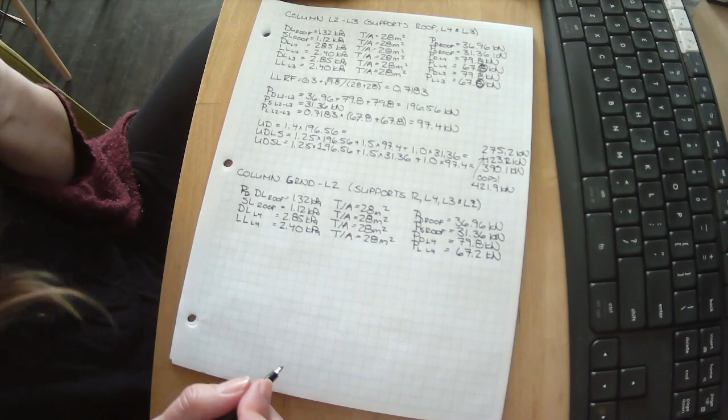Dead load level 3, live load level 3, dead load level 2, and live load level 2: 2.85, 2.4, 2.85, 2.4. Tributary areas all 28 meters squared. P dead level 3, P live level 3, P dead level 2, P live level 2.

79.8, 67.2, 79.8, 67.2, all in kilonewtons. Whew, shake my hand out.

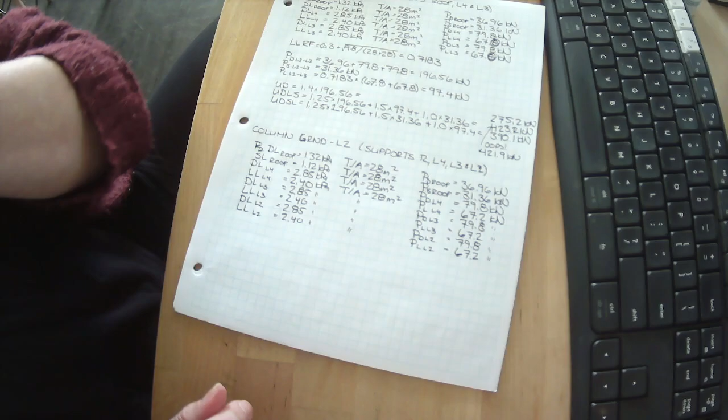Okay, let's add up all our deads and all of our lives. But before we do that, let's take a look at our live load reduction factor now. We've added another 28 meters squared of live load. So live load reduction factor equals 0.3 plus the square root of 9.8 divided by 28 plus 28 plus 28, because we've got our level 4 live load, our level 3 live load, and our level 2 live load. Remember, the tributary area doesn't need to be the same on all the floors or for all the loads.

In the example you're going to do on the assignment, you're given different tributary areas, I believe. Okay, let's calculate this tributary area. We've got 0.3 plus the square root of 9.8 divided by 3 times 28, and we get 0.6416.

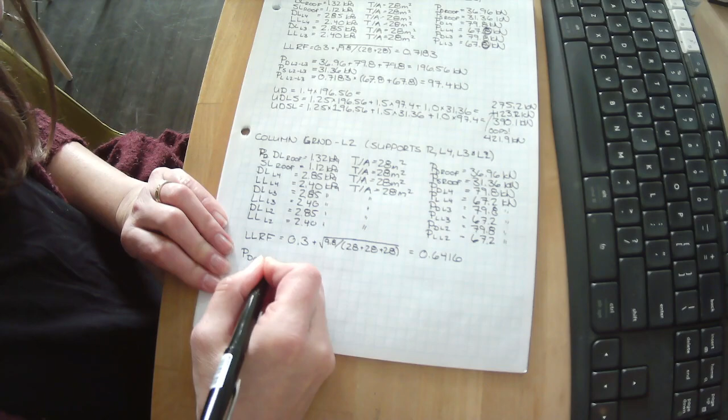Okay. P dead from ground to level 2 is our 36.96 plus 79.8 times 3 times, we had it 79.8, 79.8, and 79.8. Our P snow from ground to level 2 is just that same snow load that we had from the roof.

And our live from ground to level 2 is our live load reduction factor times 67.2 times 3, because we had 67.2 all 3 times. So our total dead load is 36.96 plus 79.8 times 3, or 276.36 kilonewtons. And our live load is 0.6416 times 67.2 times 3, or 129.35 kilonewtons.

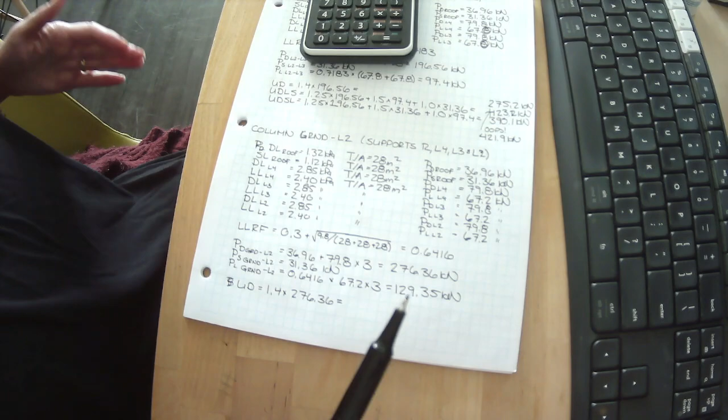Let's look at our load combinations. Dead by itself is 1.4 times 276.36. Have you guys noticed that we haven't had the dead govern on its own yet? Well, dead often governs for construction situations, or if we have a concrete roof with nominal snow loads on it. So if you were designing a concrete building in Florida, this load combination would probably be what governs. It just tends to not be what governs here.

Ultimate dead live snow. I'm not even going to do the snow live because we saw that it hasn't really governed, and we haven't added more snow, but we have added more live. Plus my live load, so 1.5 times 129.35 plus 1 times 31.36.

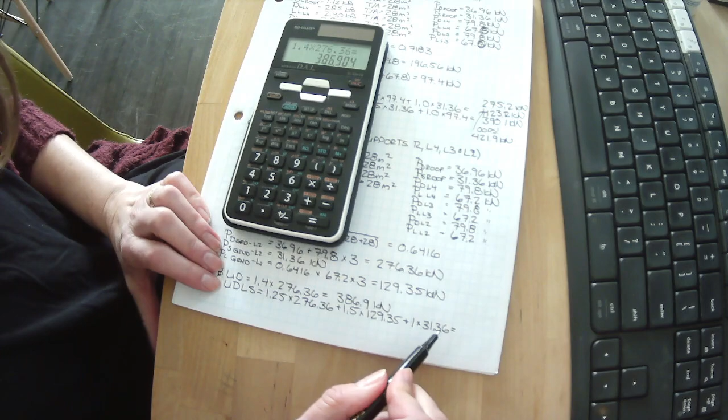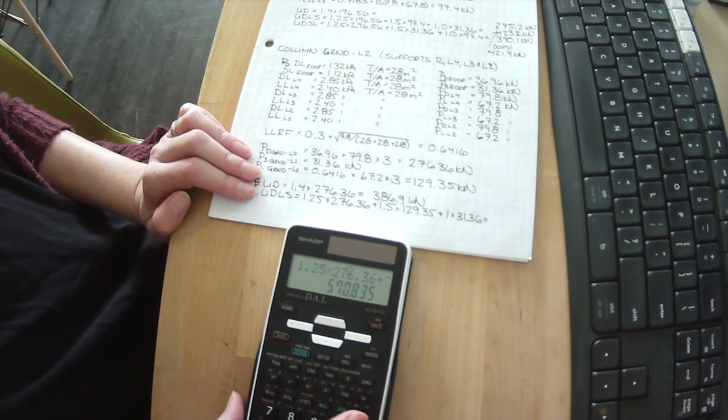Okay, the dead: 1.4 times 276.36 is 386.9. And our factored load with dead, live, and snow: 1.25 times 276.36 plus 1.5 times 129.35 plus 31.36 equals 570.8 kilonewtons. Okay, so we now know that up here we have

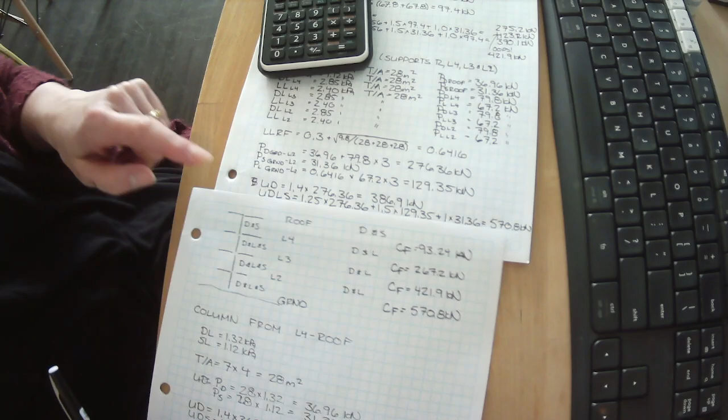570.8 kilonewtons from ground to level 2. So we now have a pretty good idea of what our factored load is on this column. So that means for this column here, we need a column with a reduced capacity greater than 93.24 kilonewtons. Down here, we need a column with a reduced capacity greater than 570.8. This is why columns will often get smaller as they go up the building, because you can save a little bit of money that way.

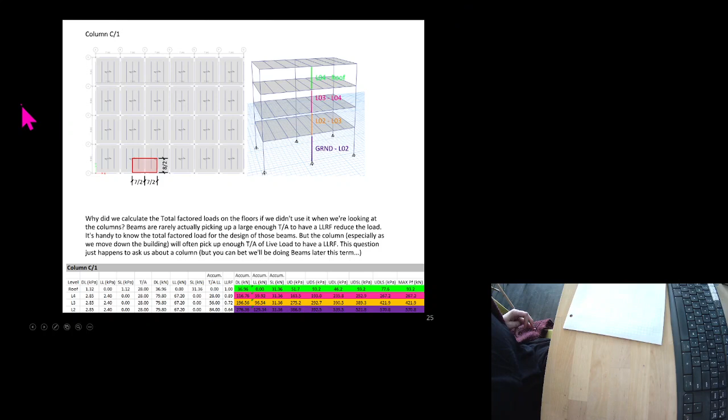So I've just gone through one column here step by step. It took about 2 pages to do the calculations. I have worked out for you completely another problem. So that was column C1. I have it worked out again with column C3, and I've also provided you the Excel sheet.

Feel free to go through and do everything I just did by hand if you are the sort that feels like you need a little bit of extra practice. If you feel like you've got a good handle on it, you don't have to do that. But this is to give you the opportunity to go a little bit further. What I've been trying to do is add more worked out examples for people. We don't always have time to go through them all in person, but I want to give you the opportunity to have a lot of resources.

So this picks a different column with a different tributary area that you can go through. Get the system down and then try the one on the assignment. But again, remember, talk to your colleagues and peers during that assignment.

I have no problem with you guys communicating with each other. In fact, I encourage it. Try not to just copy each other's answers though. Do the work, because the only person that's gonna suffer is you. I don't mind giving you the marks, but in the exam, when you don't have time to communicate and you're given different versions of problems, you won't know how to do it. So this is really just about you. You guys are big, you know how to look after yourself. I'm not gonna make sure you don't cheat for something like this. But try to make sure you do the work, because that's gonna be what helps you retain it.

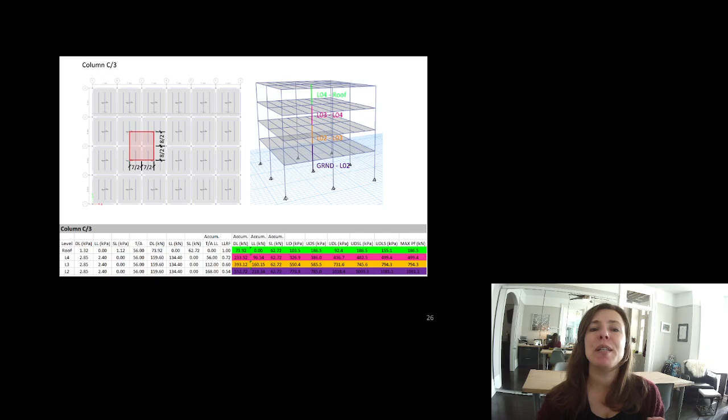Now, I'm going to tell you that you're not going to have ones this complicated. Even your project one isn't going to be quite this complicated. You will have to do this in your project for your column, though, and we're going to do a little bit more with it. We're actually going to learn over the next couple weeks how to draw a pretty picture that tells us what's happening in this column. Because this chart, while helpful, it might be nice to see a visual graphic of what's going on. Hopefully, where you guys are in an architecture program, you will really appreciate the visual side of it. And so that's going to come in a little bit.

Okay, what are the takeaway tips? This lecture's on the shorter side, closer to the 2-hour mark, because I know last week's was a really long lecture, and I want to give you a little bit of a breather. I like them to be around 2.5 hours, and so over the 2 weeks it kind of balances out. It's hard, there's not a good place to stop - you have to kind of get through a set of information.

So, forever, you should remember that there are more than the standard loads. You can have pre-stress, you can have temperature loads. It might not be what impacts you all the time, but it might be something that you need to talk about with your engineer. We factor the loads and reduce the capacity of the material. We combine all the factored loads to find the worst case factored load. We also combine unfactored loads for serviceability. Different elements could have different worst case combinations. So we saw that our column from level 4 to the roof was governed by the dead and snow combination, where the other floors were governed by dead and live as the companion with snow, or live as the principal and snow as the companion.

Okay, for studying, you should know how to do soil pressure on a foundation wall. I'll give you one of those in the exam - I promise you there's going to be one of those. But I give you all the information, so just follow that formula and you'll be fine.